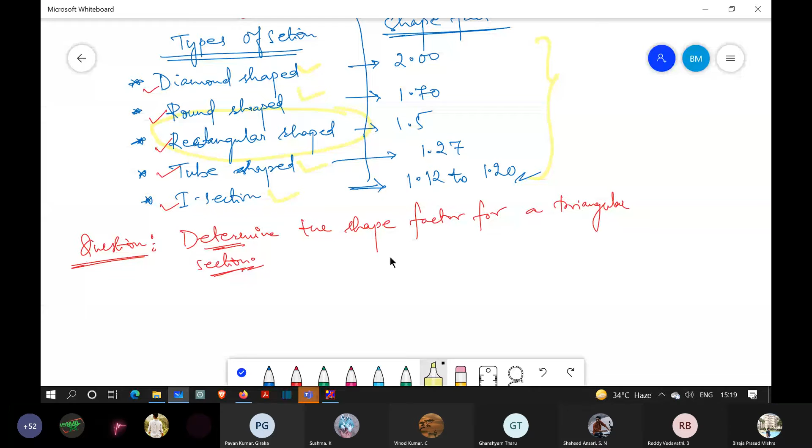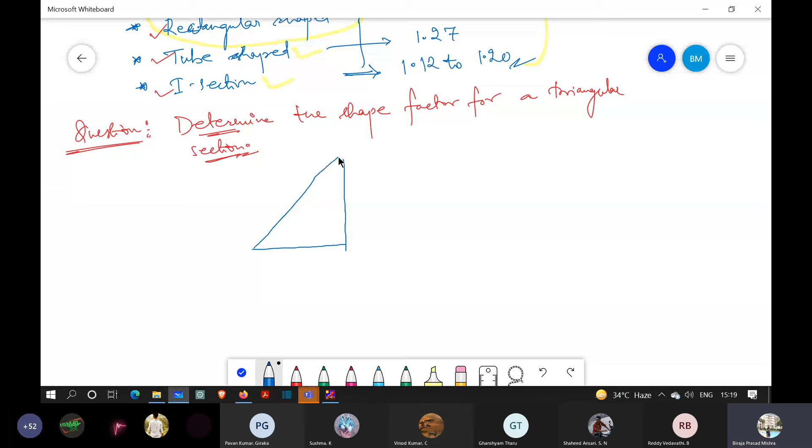Now in the question we have a problem where we need to find out the shape factor for the triangular section. So first of all, let us say that we have the section like this. This is one section. This is a right angle one. And through this line we have the neutral axis. I am showing it as NA. This one is the neutral axis.

And this one, the height, is given as H. This is given as B. And here we have the same one. Sorry. Now this distance is B1 and this distance is H1. And this is the section. You can write NA here, neutral axis. Now we have to determine the shape factor for the triangular section. Before we determine the shape factor, all of you please take down this diagram.

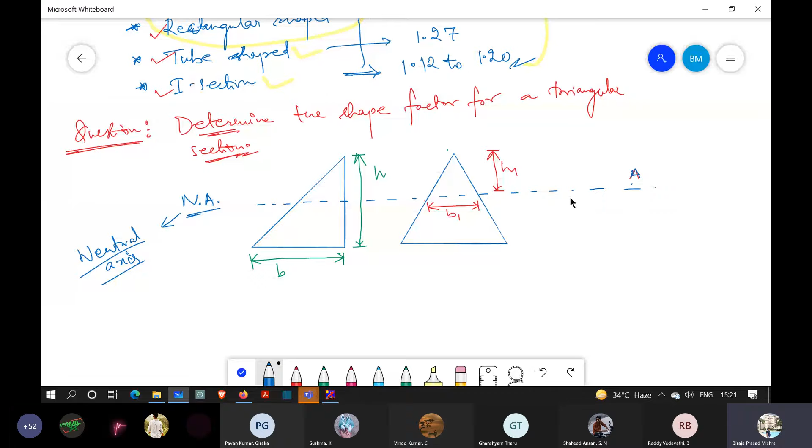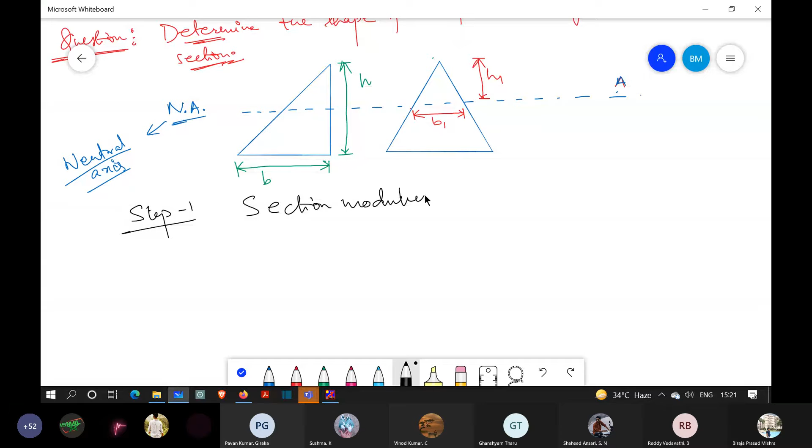So the first step we need to calculate, step 1, is the section modulus. Now what is section modulus? I equals to, this we already know, BH cube by 36. And from this the minimum section modulus S min will be I by Y max. Now what is the value of I? The value is BH cube by 36.

And what is Y max? What is this value? Who can tell? It is 2/3 of what? 2/3 of H. From this diagram it is 2/3 of height. So please solve this one. How much are you getting? It is BH cube by 36, into 3 by 2H. This 3 and 2 get cancelled, and this H and this H get cancelled. So BH square divided by 24. This is the section modulus.

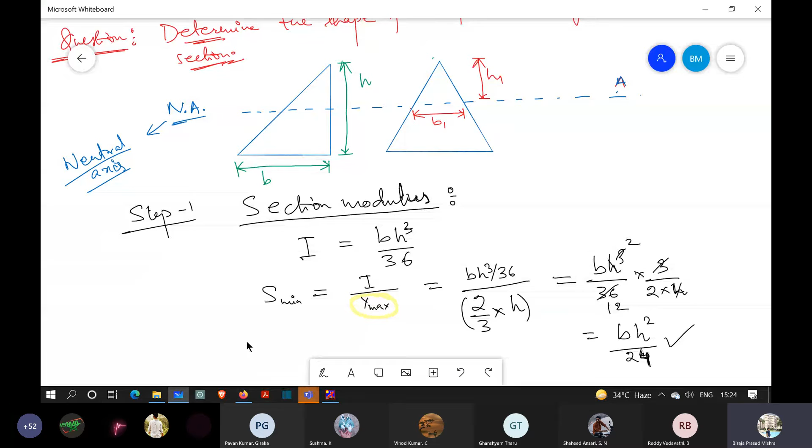Now the second step, step 2, is the plastic modulus. Before I go to the plastic modulus, let me show that this one is the same base. So next step, all of you please pay attention, because this part might not have been taught to you in any earlier classes. Whenever you study your design of steel structures, you will find it difficult to understand. In steel structures this part is already there. So for plastic modulus, first let us see these ratios. Please pay attention to the diagram.

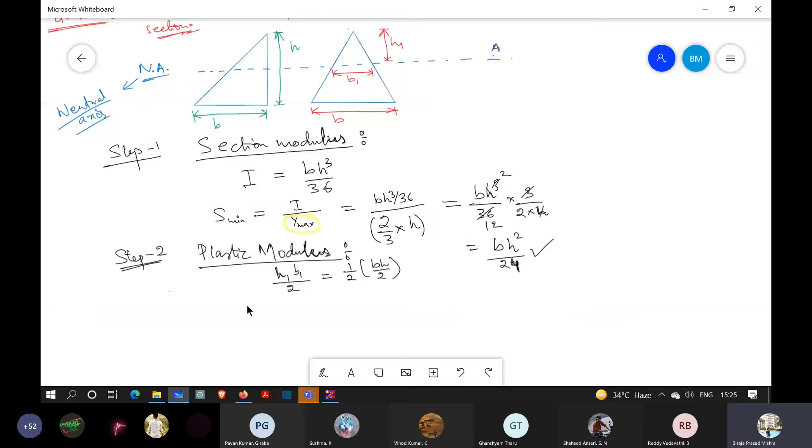Can I write H1 B1 by 2 equals to half of BH by 2? Can I write like this? But we already know that H1 divided by B1 equals to H by B. So from this we may say that B1 equals to B into H1 divided by H.

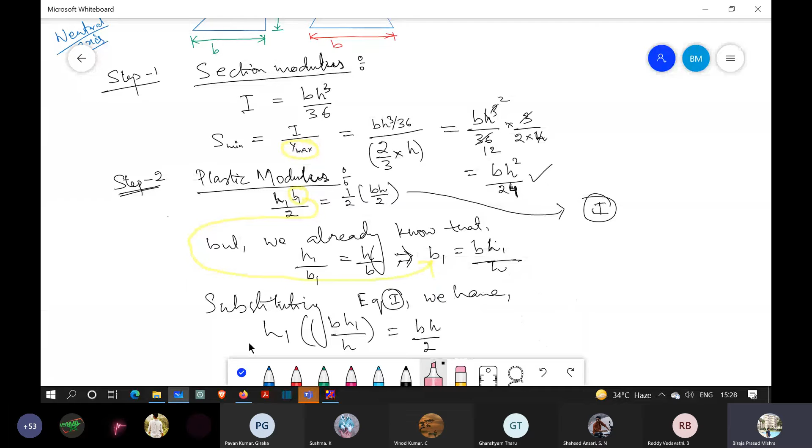So let us say this is equation 1. Substituting equation 1, we have H1 into BH1 by H equals to BH by 2. So in this equation I have substituted the value of B1. What will be the value of H1 here? So H1 equals to H divided by square root of 2.

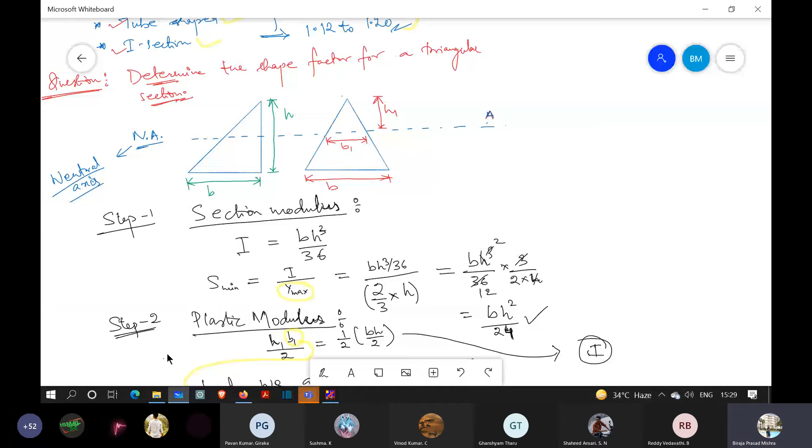Similarly, we can have B1 equals to B by root 2. Now, for both the triangles, what will be the area? What will be area A1 and A2? So can I say A1 equals to A2 equals to half into BH by 2.

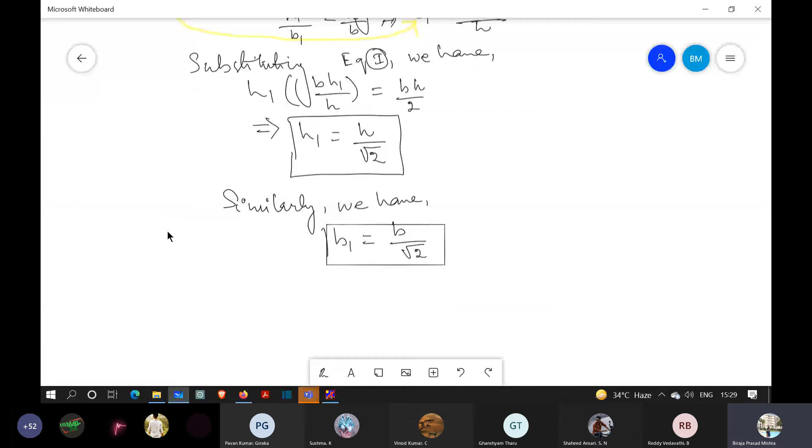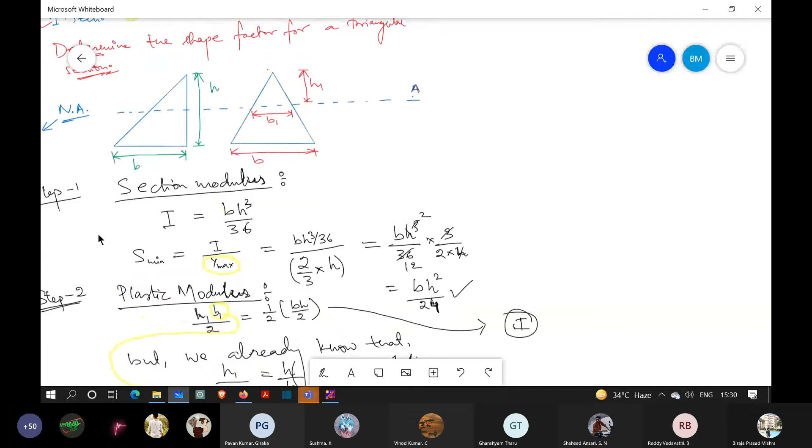And here, since this one is the neutral axis, the stress distribution... So here at this position and at this position, let us say this value is y1 and this value is y2.

This is sigma y and this is also sigma y value. Okay, now here I am writing one more point. What is this y1 and y2? Okay, so y1, or you may write this one y1 bar and y2 bar. Okay, let us write y1 bar and y2 bar.

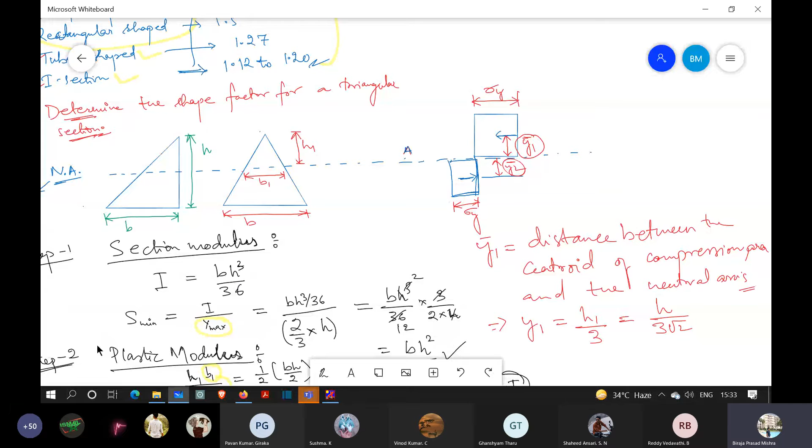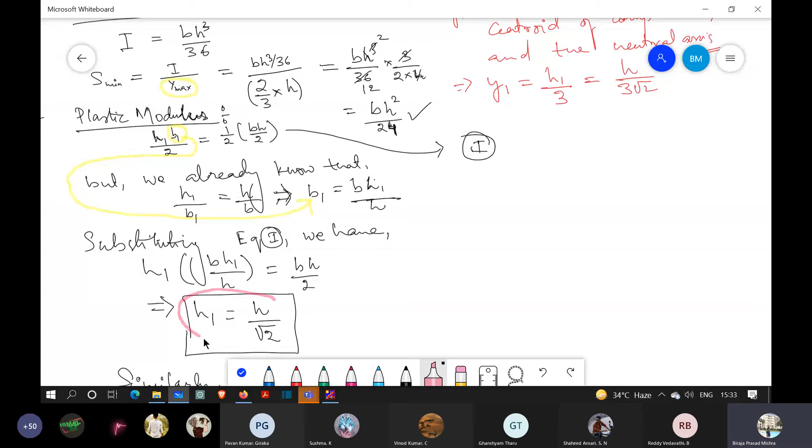h1 by 3. So what is the value of h1? So h1 is h by root 2. Here we found, okay, see, here we have found h1 equals to h by root 2. So this implies y1 equals to h by 3 root 2.

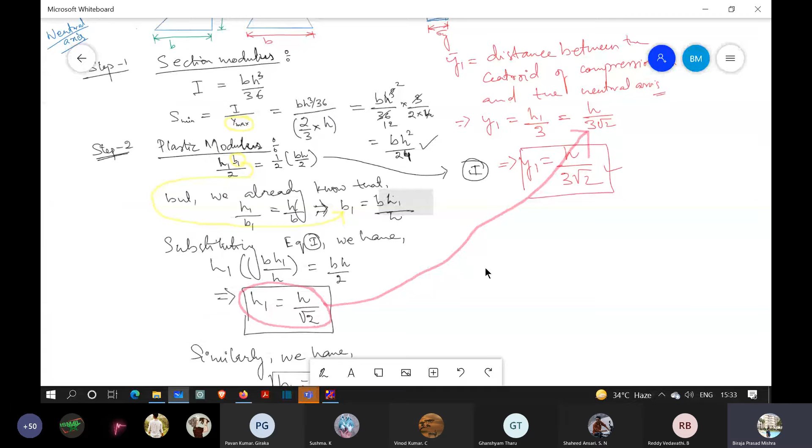Okay, now what is y2? Are y1 and y2 same? No, because y1 is for, again you are not saying anything, compression area. Okay, and similarly y2 bar equals to distance between the centroid of compression and the neutral axis.

Okay, now what will be the y2 value? All of you please pay attention. So I hope you have written this y2. What is y2? So I'm writing it here. So y2 bar, whatever you may call. This is bar. Okay, y2 bar equals to h minus h1 by 3 into b1 plus 2b by b1 plus b.

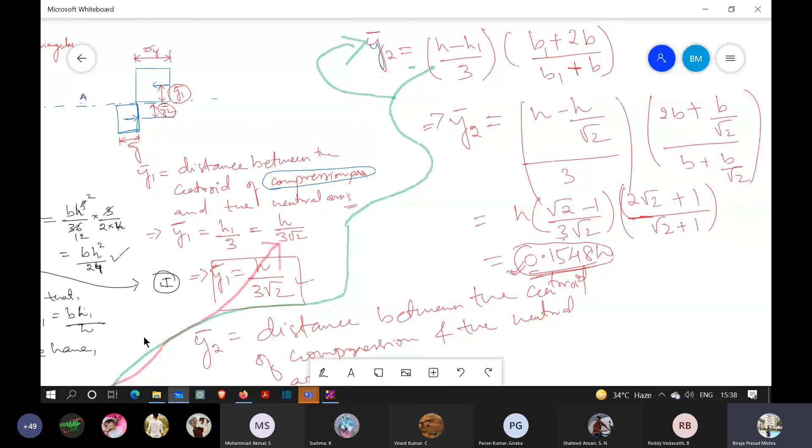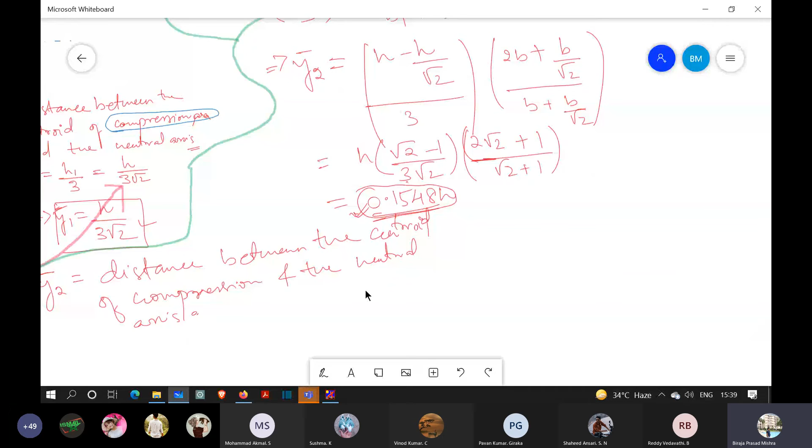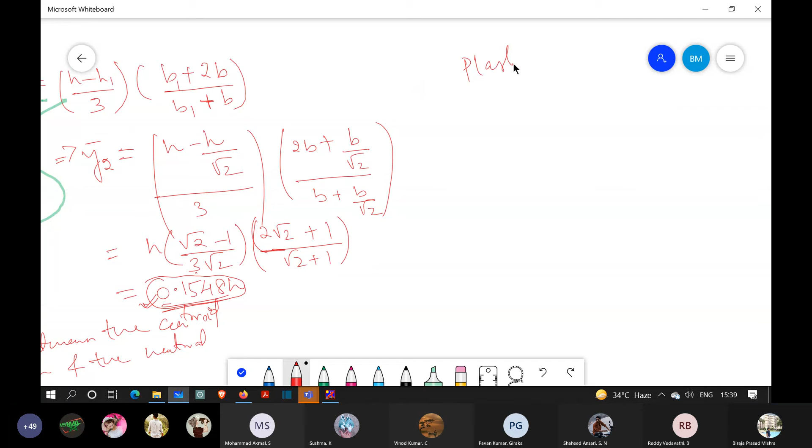Now, the next one. We have determined h1, we have determined b1, and we have determined the section modulus, and the plastic modulus is given by, I'll write it here. So plastic modulus is Z equals to bh square by 4 into 1 by 3 root 2 plus 0.1548, h being taken common.

So this becomes 0.0976 bh square. That is your plastic modulus. Okay, so we know the section modulus and we know the plastic modulus. And if you go back to your notes, what is the relationship? Anybody remember? So shape factor equals to Mp by My. Mp is the plastic moment and My is the yield moment.